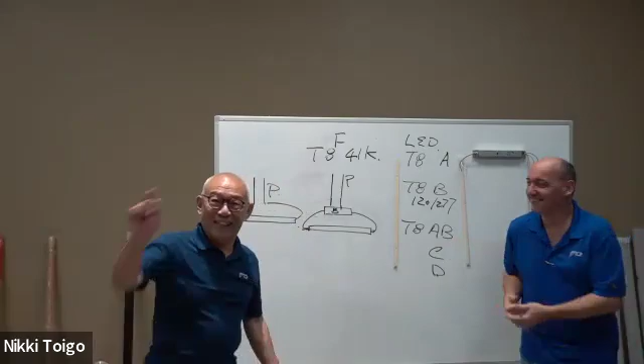Good news because in California it's 11:30. That's why we do it twice a day—we're taking care of people from the East Coast, and also people from the West Coast.

Today, look, we changed the shirt again. New shirt, I wore your color today. Not the same shirt, close though. But hey, I like your color, it's a good color. Today is Friday, right? I think everybody's getting ready for the weekend. Summer started, the weather's so nice out there.

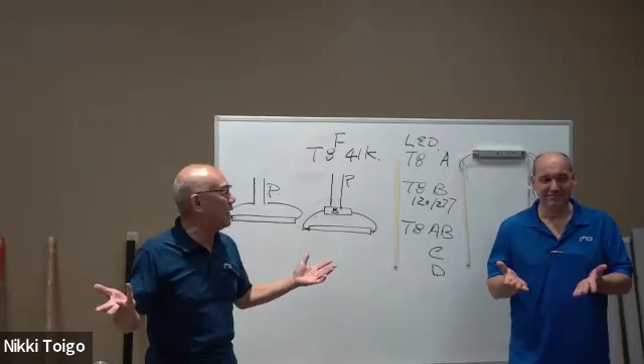So that being said, right now Paul and I, we're lighting people. We talk about lights all the time. And the one thing that really brought to Paul and my attention today is something so basic, something so bizarre. You may wonder what we're supposed to talk about—lights, yes, talking about lights, but one thing is so bizarre.

We found out recently that in the West Coast, California, all the way to Seattle, the fluorescent T tubes will be outlawed, gone. I think it's time to do it, because they're so inefficient. They're really hazmat, they've got a lot of mercury in them. By the way, if you didn't know, I used to eat mercury—he ate some mercury, that's cool, you can catch that video on YouTube.

Then you have to go with the recycling program, and if you don't, that's going to penalize you—they fine you. But the bizarre thing happening right now is people are buying fluorescent tubes like crazy, everybody wants them now, all of a sudden. Remember a few years ago when the incandescent bulb was outlawed, everybody was buying incandescent bulbs. We understood that because people like the warm fuzzy color in their home, but they didn't know what was gonna happen.

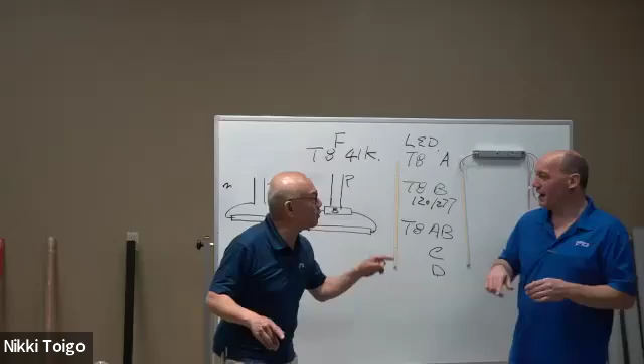Fluorescent tubes—come on, we already have a replacement. So let's rewind a little bit. Today, Monday, we talked about a panel. We said that 60% of the lighting in office buildings are panels. Also today, the major lighting companies, let's say Acuity, Cooper, big companies, are supporting this panel, and obviously we too are supporting these panels. But 30 years ago was a much different story.

At that time, the troffer in the office was not controlled by the fixture company, actually controlled by GE, Philips and Osram. At that time they sold hundreds of millions of those fluorescent tubes. I tell you, everything has a history. Because of that, people kind of stuck with these fluorescent tubes in their head. But also look at the business side—no matter how hard we try on the panel side, you still have a huge amount of traffic out there, people still want to use the tube, doesn't matter which tube, they don't care. Okay, so no problem, if that's the way you want to do it, do it.

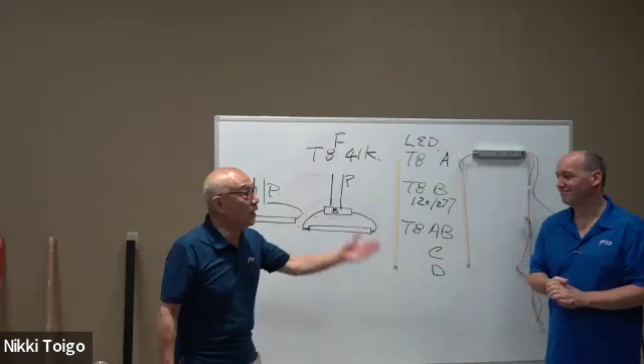But what really drives Paul and I crazy is, why do you have to use fluorescent tubes? Because today, LED tubes are far more superior than fluorescent. So let's start from basics. Tell me what today the basic LED T8 tubes will completely and totally replace of the fluorescent.

Just a direct replacement—grab it and go, grab and go. That is what we call our LED T8 tube, type A. So what does a type A tube do? A type A tube, and that's an industry-wide thing, you'll see it everywhere—the type A tube will go right into that fluorescent fixture and work with the ballast that's already in. So let's look at the fluorescent ballast.

Here is the power, P, coming down into B, which is the ballast. Come on, ballast, right? So there are two wires on each side, which light up the fluorescent. So you're telling me I can take the fluorescent out and put this LED T8 type A tube in? Yep.

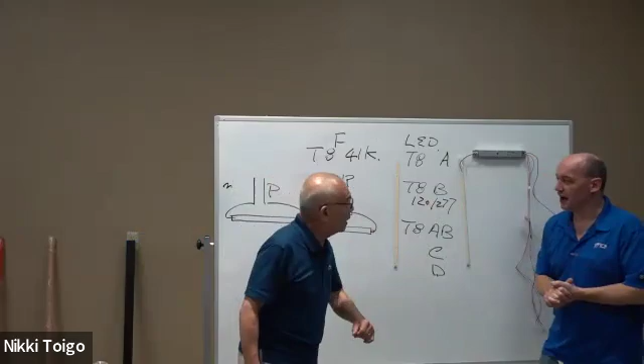Are you telling me you just pop in any socket you want? Yeah, that works the same, it should work, yeah. You're sneaky with that.

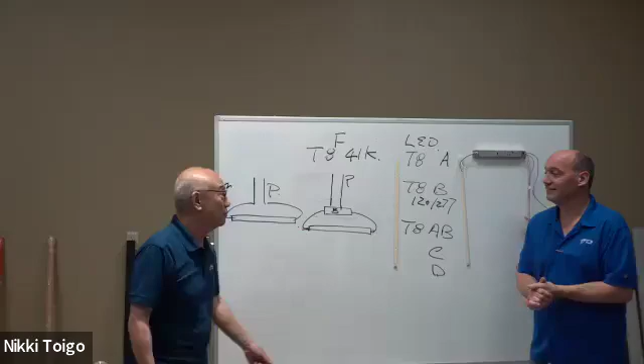That's a sneaky trick. So if that's the case, why do people have to continue using fluorescent tubes? You don't have to. I do recommend that you change the whole fixture with one type.

Sure, they would work. We love to sell the panels and troffers, but today let's just focus on the fluorescents.

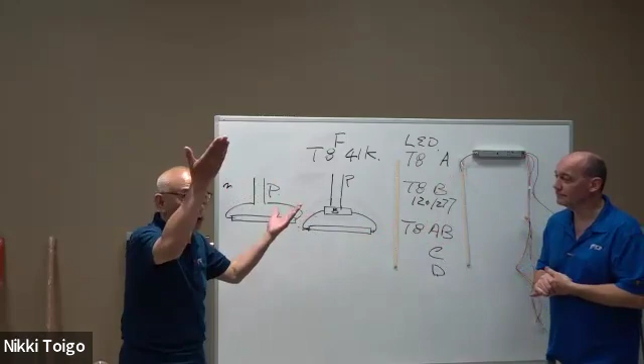So let's also tell us, Paul, if you put a fluorescent and LED side by side, since they are equivalent, how about the performance?

Well, I can tell you which one's better - this is gonna outperform the fluorescent, I can tell you that. Why? The fluorescent's gonna degrade over time. The fluorescent phosphor is gonna degrade, the lumen output's gonna be lower, the color of the light's gonna change, whereas the LED is gonna be much more stable for a longer time.

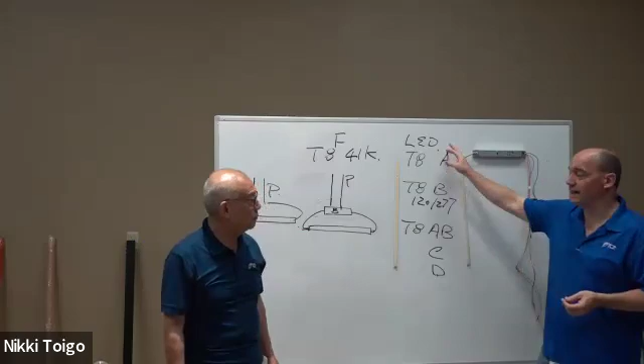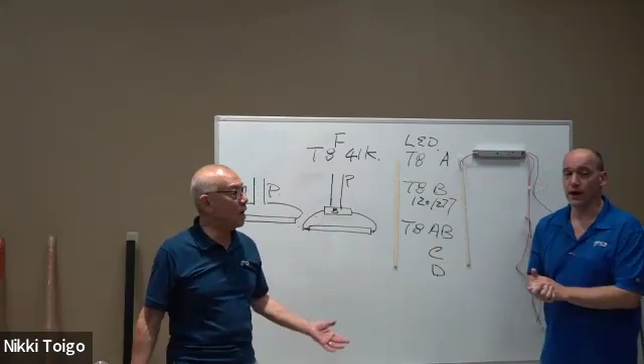Have you guys noticed, when a fluorescent's getting to the end of its life, it turns into pink? Yeah, color shifting. LED will never do that. LED is very consistent, very stable, extremely stable.

For 5 years, LED also has a lumen depreciation, but it doesn't shift the color, and it doesn't depreciate as quickly. Not even close, not at all.

Especially today, our LED chips - remember, we make the chips. We have good chips, and the good chips really make the light output consistent, make the color consistent. So that's why there's even no reason, no reason for people to use fluorescent.

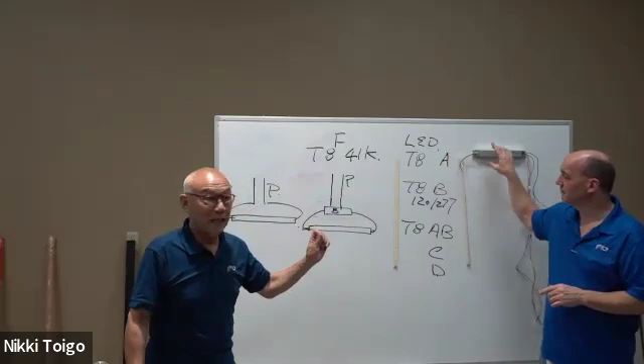Please, let me give you some terminology. Type A, type A, right here. So that being said, Paul, in general, doesn't matter if it's fluorescent or LEDs in it - you have fluorescent, you have type A.

There's one thing you don't know, one uncertainty of this whole thing. There's one thing - which one? What's gonna happen to the ballast?

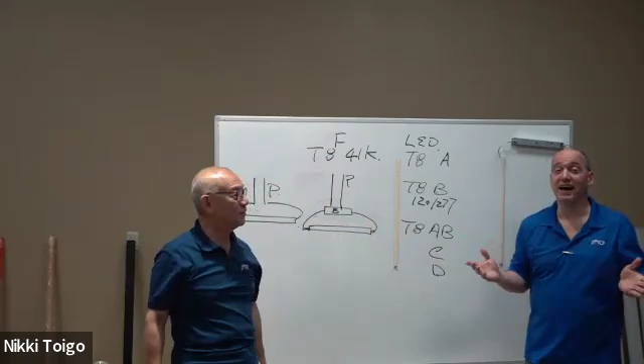What's gonna happen? Because let's face it, in our building here, we have more than 100 of the troffers here, right? Yeah, we have a ton.

We have no idea what's the ballast inside, or how old the ballast is, or when the ballast was last changed. So for the same token, even for the fluorescent.

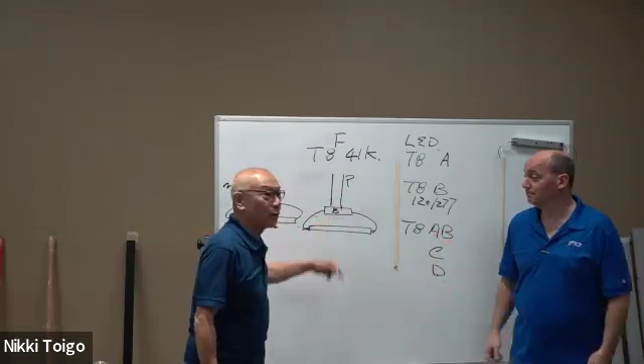So tomorrow, Paul is out of luck - I changed it out, I put LED in, now my ballast blew. The ballast blew, now what? You only have two choices.

Let's not talk about the second choice later, let's talk about the first choice. The first choice actually is very simple, easy way - let's change this ballast, change it out. People still do that today.

I'm not kidding here - that's gonna cost me a lot of money, 20 to 30 bucks just changing that? Are you kidding me? How much money is it gonna cost me?

Right, that's why today we have the LED type B tubes that don't require a ballast - that's a better solution for me, at least. So what is that called? That's our LED type B tube, the type B tube. What does the B mean?

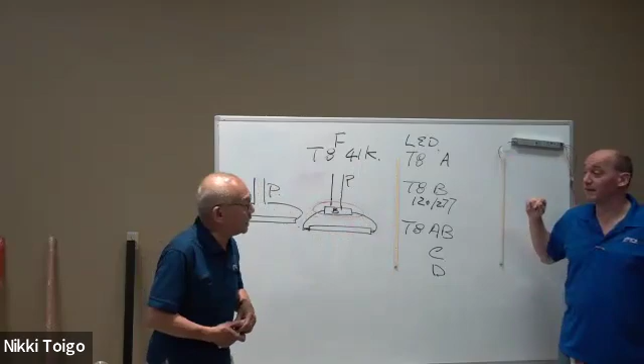So B is the bypass tube, and you'll see that as well. In other words, we talk direct wire, run the voltage right into it. Direct right, 120 to 277.

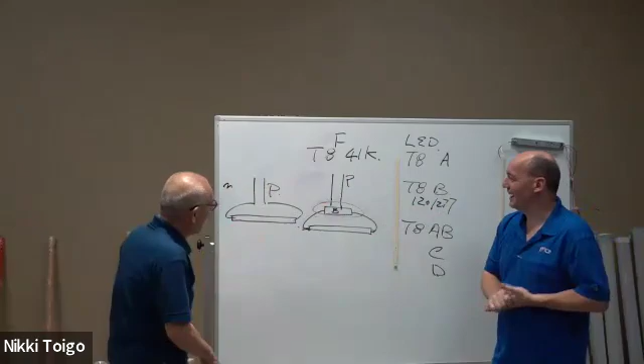So in other words, if you come to here - I'm not really good at drawing pictures, but that's a good picture. P is the power, right? One power's coming in, ballast in the middle, power coming down to both sides of the tubes. Boom! There you go. Job done, life is good, very easy to do. It's very simple.

So today, actually more and more projects - let me say projects, not replacement - projects are shifting to type B for the simple reason because people do not know how old those ballasts are. That's end of life on the ballast. Getting more and more popular. It's also so easy, right? You don't need it because today the tube technology is so good. It's very good.

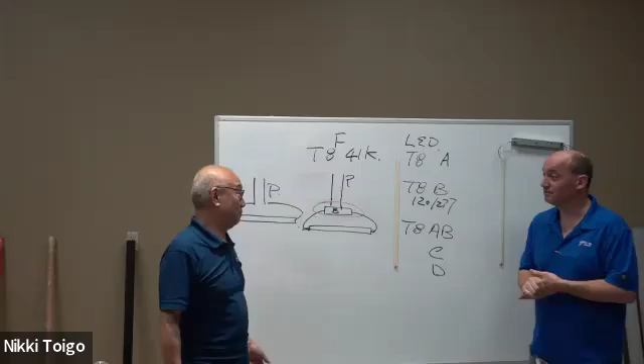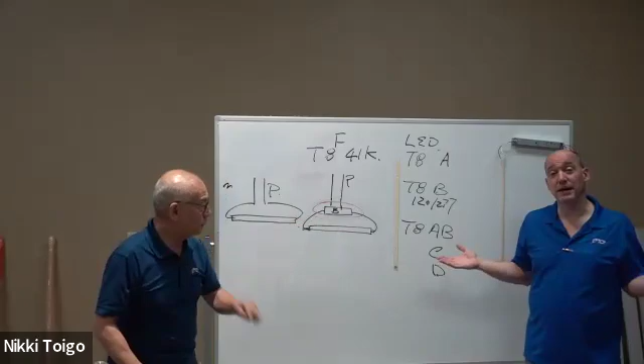However, you still have people out there who don't want to put up with the retrofit, this and that. They just simply say, okay Paul, I listen to you, I don't buy the fluorescent anymore, I put LEDs in, fluorescent. But Paul is so nice. Paul, tell those guys, what if ballast burns out? What do you do right now? Before people do that, Paul said, would you listen to me? I do have another solution for you, because you might not want to pay to bypass the ballast right now. You might want to wait.

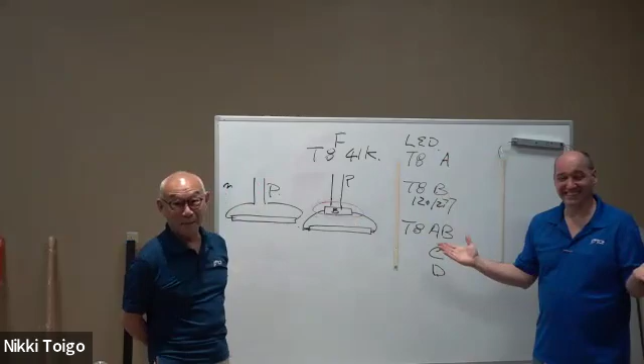So what's your solution? My solution is this type AB tube. Oh God, now it's getting fancy. AB tube - that means it's A, it's B, it's B, it's A. It's A plus B, AB tube. What is AB tube?

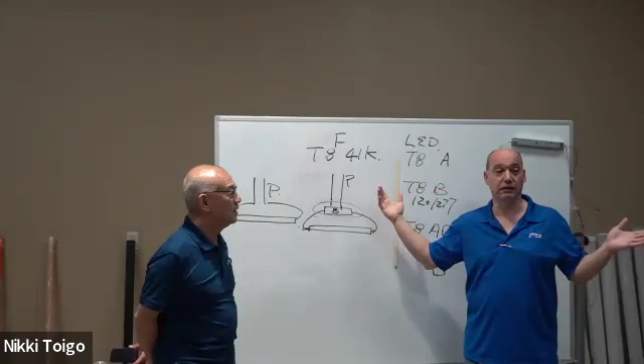Well, AB tube's great because I don't want to pay somebody to come in and bypass my ballast and do all that. I want to see how many years that ballast might last, or months or whatever. I just put it in. It works. Then my ballast burns out. I'm like, oh, now what am I going to do? No worries, just bypass it. Now it works on that too.

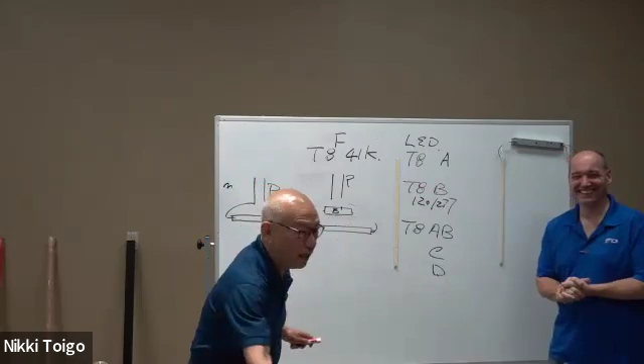Let me tell you what happens here, okay? We disconnect here - that's called bypass, okay? Right, disconnect. We disconnect here, okay? We leave this ballast over there. We tell the ballast, rest in peace. Okay, just stay there. And then you take this guy, the power from here, come all the way down here. There you go, that's it. Very easy.

Same tube. Same tube. You never change the tube. You're not buying the tube twice, just buy it once and you're done. For us, that's called A and B, we call it A plus B. That's really a short-term solution and a long-term solution together.

It's very good for starting, it's very good for people who don't know. Because some people say, I don't know. Fine, if you don't know, take AB tube. This is like your future proof. This is so cool.

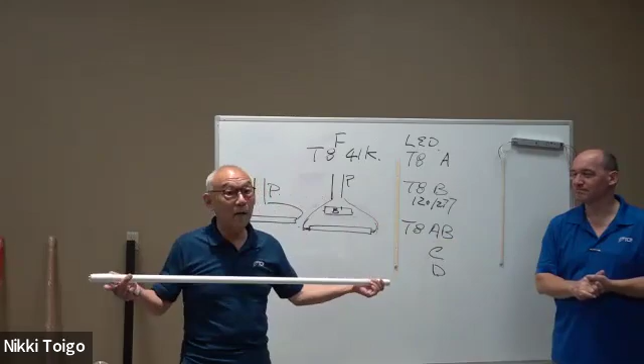Basically what we do is, if you look at this tube, we put two drivers inside - an A driver and a B driver. And it senses the current inside. It knows exactly if it's operating with the ballast or without the ballast. Pretty smart too. Yes, this is called the lighting AI concept. I'm making this one up, I just want to get it fancy, you know? So this is really cool.

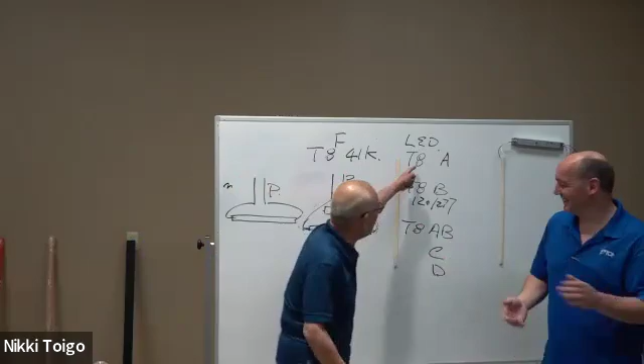But even we do more than that today, okay? One day Paul comes to the office and says, Ellis, I have a C and D. I said, what the heck? Now we talk A and B, A plus B, what's a C and D? Well, type C was something that somebody pushed for. It is an LED driver, something like this guy right here, okay?

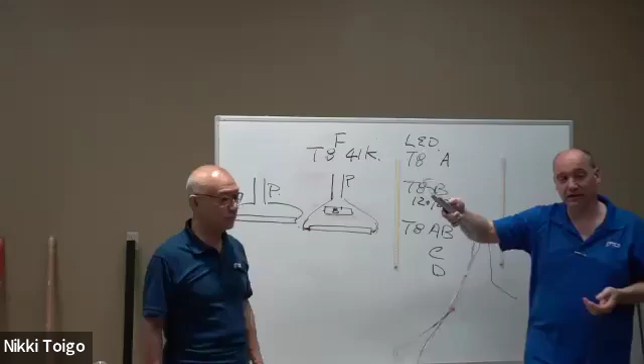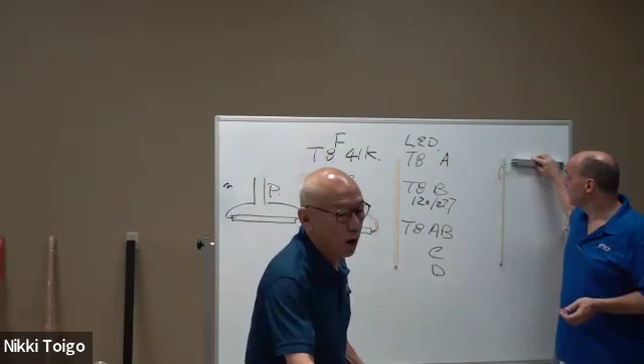So Type C requires you to replace your fluorescent ballast and put a Type C tube in there. That means the Type C tubes have no driver inside, LED only - so it's a driver plus an LED-only tube. Very simple, and it was popular for a while, but then it kind of went away because nobody wants to do all that work. The utility rebates at that time really relied on Type C.

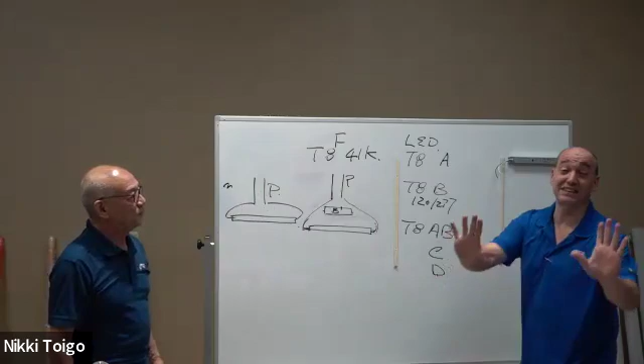But what happened to Type D? Type D is something special - I gotta admit, we kind of made that up. Type D is this driver right here, part of our magnetic retrofit kit.

So I have a magnetic strip, and two of these tubes are run by this driver. This is great if you need a quick troffer replacement - it's magnetic, pop it in there, plug it in, add your power, and you're good to go.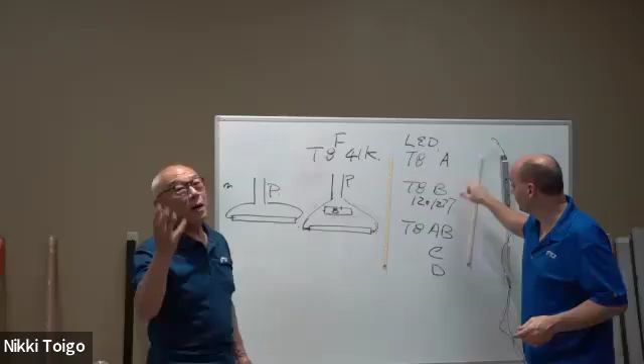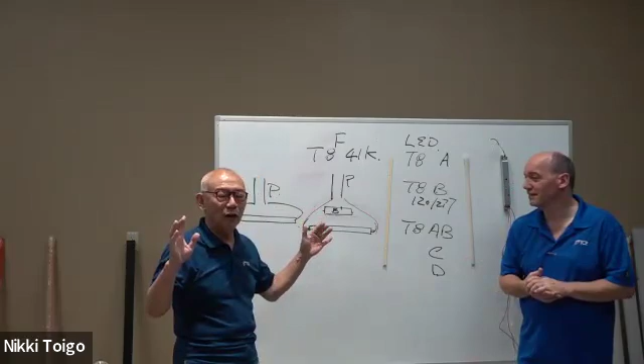Remember, we're in the retrofit business - and the retrofit business is kind of a nasty business. You have a situation with an old fixture, and if you want to change it, you'd have to rip the entire ceiling off. So you're kind of stuck, with very limited ways to do it.

So what I'm saying is very simple - just put the whole thing inside. Because it's a magnet, let me do it again... yeah, it just sticks to it. That's it, done. You're getting better at that - I used to be really good at this, just out of practice.

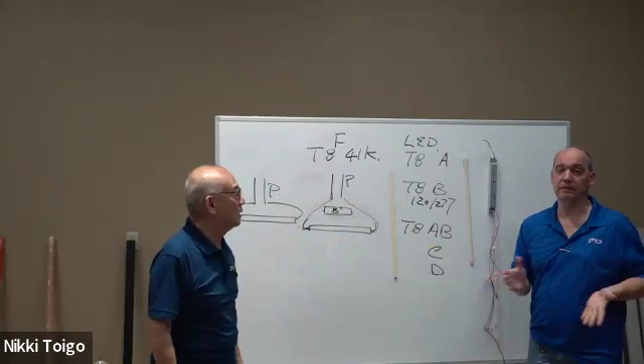So it's a very simple change out. This is a wattage and color selectable driver, so you can change the color of the light coming out to match whatever you may need.

Let's come back to the fluorescent again, because I'm still upset about that. Here's another thing fluorescent tubes were never able to do that our LED can do - CCT selectable, color change. Fluorescent can never do that - you can't change the color on a fluorescent.

So today, all our tubes have either 3 colors or 5 colors. Would you show them the switch on the tube? So I have this tube right here - this is our color selectable tube. I'll bring it up so you can see it on the camera.

Right here you see that little blue switch - it lets you change between 3,500K, 4,100K, and 5,000K on this tube. Normally 4,100 is the most popular color. We also have a 5-color version, which covers 3,000, 3,500, 4,000, 5,000, and 6,500K. The only difference between the 3 and 5 color versions is that 5 covers 3,000 and 6,500.

Some places, especially down south, use 6,500K, though most people will use 5,000. That's another huge advantage of LED over fluorescent - something fluorescent will never do.

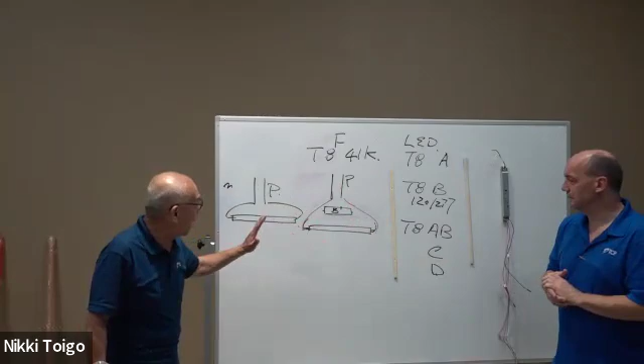Now there's something else you have to have - every fluorescent fixture out there had to have an emergency exit solution, which manifested as an emergency ballast. Obviously our emergency ballast may or may not work with our new LED tube, so we had to come up with a solution. Because you have to have 3% of the lights or tubes be emergency-rated, ours was pretty simple - we made an emergency backup tube.

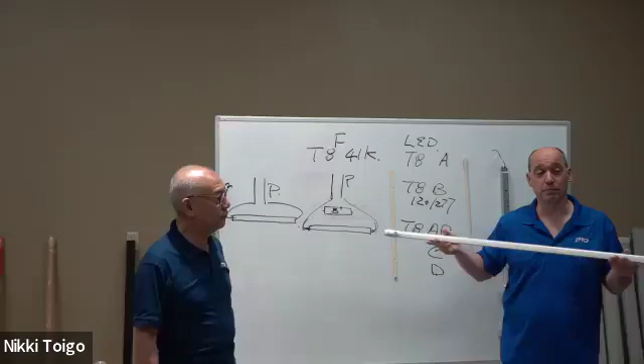When the power goes out, the tube kicks in, providing light for 90 minutes plus. Would you show people the close up?

Tell people why you have to have a switch on it. Right here is the emergency test button, which is required by code. And then there's also a switch on it. That switch, we leave it in the off position when we ship it to you, because we don't want the battery to run out during shipping. Remember to turn it on after you install it so it'll work fine.

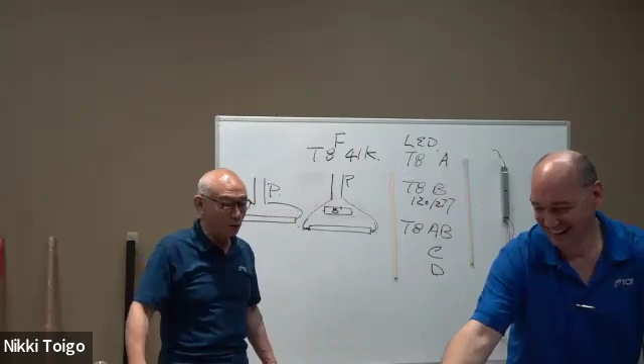Everything we do comes from lessons we learned. We learned that lesson, okay? We have products in the warehouse all the time where we didn't realize the switch was on. After you ship it out, people say, what's wrong with you? Well, we were shipping it with the light on.

You also have to understand, because this is an emergency light, we call it single-ended. The other side requires constant power to charge the battery, so it requires a little extra wiring for the emergency function. But we will give you all the instructions on how to do that. We'll walk you through it, so you shouldn't have any issue.

Now, that being said, there's one tube - this is one of my favorites. Slow down here, Paul. One of my favorites, one tube I hate the most - the 8-footers. I have those 8-footers. Kevin hates it, Paul doesn't, I don't know what's going on. I like these 8-foot tubes. I hate 8-footers because I have to build 8-footer pallets to ship them. I want Ellis to like them just as much as me.

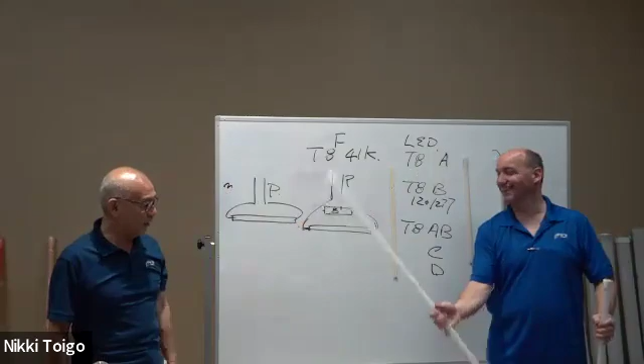So Paul, what is that? No, no, no, here's my 8-foot tube, Ellis. It's only 4-footers. No, okay, watch this, Ellis. Keep an eye on me here, okay? No, you need to line up, I think we're okay. Oh, she's so good. I had practice on this, maybe not. No, Paul, you see, he doesn't know everything, okay? I do know something. I try, but then the master has to take over. Hold on a second, okay?

First of all, there are 4 pins, so you line up, and they just mesh together. After you line up, then you slide this up. Very simple, it takes less than 1 minute. There's your 8-foot tube.

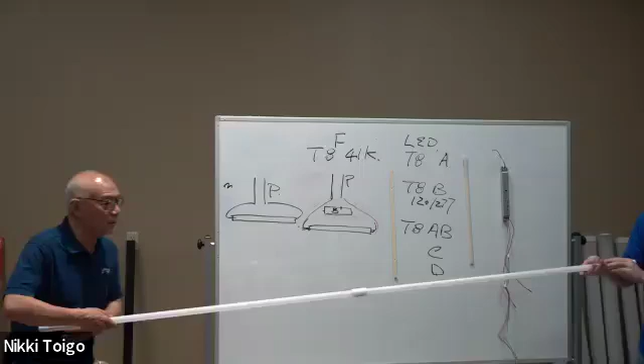Now Ellis might like them as much as I do. Look, it doesn't bend in the middle, you see how straight it is? Very nice, okay, number 1. Number 2, the plastic in the middle is transparent. So if you put it up there, as long as you are like 3-4 feet away, you don't see it. That's how cool it is.

In the meantime, we're going to take this one off, then Paul, you're going to show them something else very unique about this, because this is a very nice product. So if that wasn't enough for you guys.

Just in case, this tube - see if we get it lined up there - is also wattage and color selectable. So it's 5 color options: 30, 35, 40, 50, and 6500 Kelvin, as well as wattage selectable, with 3 wattage selections available. But wait, there's more, Ellis. I feel like one of those infomercials.

So you notice I have the FA8 end on there. Also, I can pull this off, and I have the R17d base right here, which comes in the package, goes right over these pins like this. And then I also have the R17d base, also included in the box.

Isn't that cool, guys? That's why I like 8-footers. We basically walk you through from beginning to end. It's a very common product today, but I still get frustrated going back to the beginning. We have to, with your help, everybody has to help us spread the news and the stories out there.

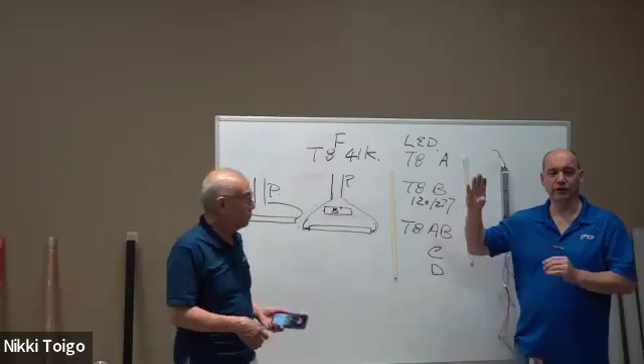So they're turning on and off, 20,000 times. That's why some people say they get a headache, because it has a high frequency flash. Fluorescent will give some people headaches. LED doesn't. LED truly doesn't.

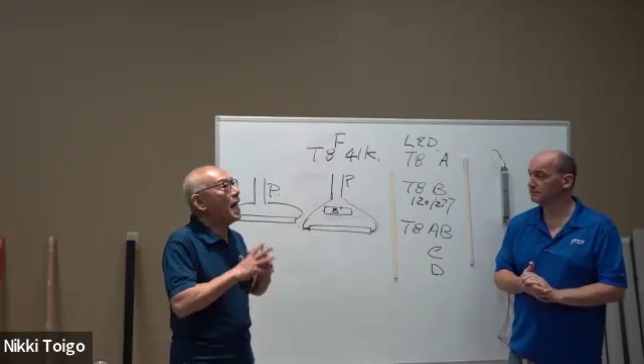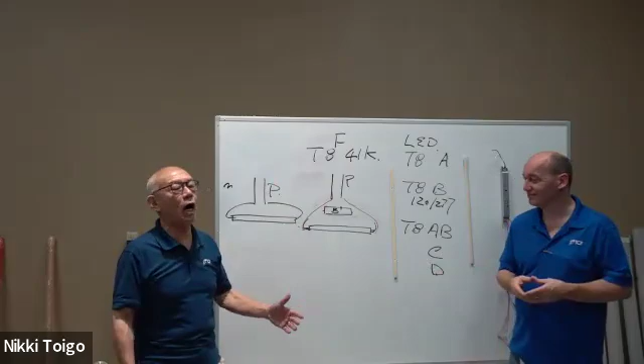So by any means, for the performance, the colors, for anything you can think about, the only thing we cannot help people with is their stubbornness. We can't change that. Please do not be so stubborn. Please use our products, we will be so happy.

Just tell your friends, reach out to us, we will go through education with you. If we have a big job out there, we'll be so happy to send samples out. We're really big on making sure samples go out.

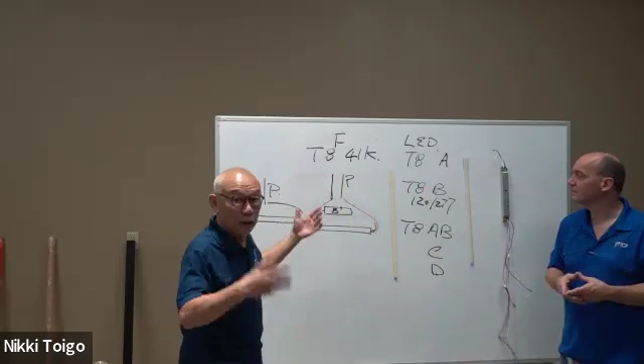Also, just to have an easy way for people to change over, on type A, normally we do CCT with 3 colors. But just for the change over, to get people the best price, we also do a single color of 4100K, to make it the least expensive possible, so it's easy for people to change.

So that being said, there's no reason, Paul, right? No, there's absolutely no reason. You're talking about an equal cost here. It's very simple, it's a no brainer.

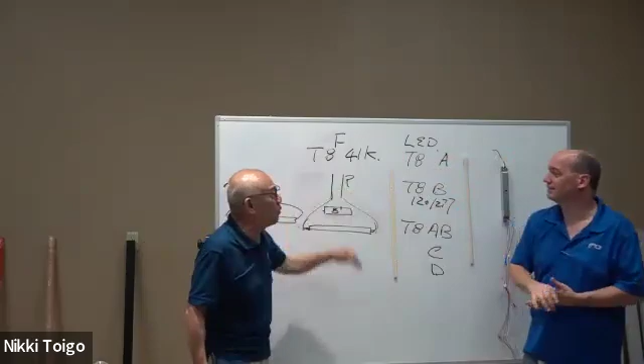It's more expensive. The guy who makes the fluorescent tubes isn't stupid, he jacked up the price right now because everybody's buying. That's true, they're buying, I was speaking before the price jack.

I'll tell you, one of the major guys is actually a friend of mine, and I told him, hey, you have to take it easy, okay? Jesus, take it easy. They might not be friends anymore. That's all right, okay?

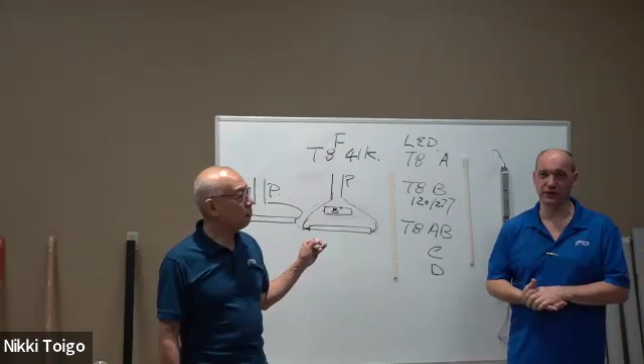Okay, so that's that. If you have any questions, please let us know. In the meantime, remember, Paul and I, TCP, we are solution providers, we provide the solutions for you. You just have to reach out to us. You have a job out there, you have your thoughts, you have ideas on the products, whatever help you need, reach out. We are very capable.